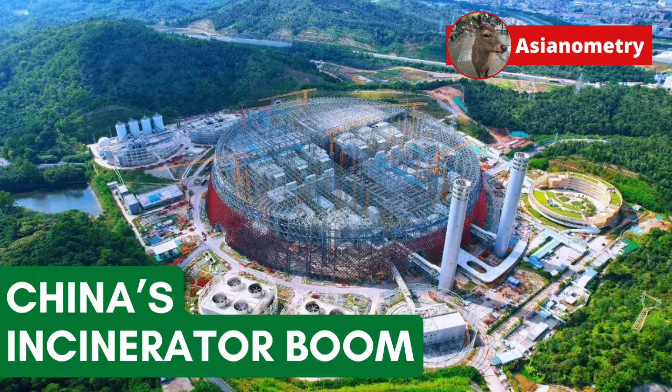How did China build 700 incinerator plants in 6 years? In today's video, a look at China's 2020s incinerator boom.

We burn our municipal solid waste for several reasons. A major one is that we want to reduce the volume of the waste. Incineration leaves behind a pile of ashes that is about 25 to 30% of its former size, saving a significant bit of landfill space. For Asia's megacities, which have limited space, this is huge.

A perfect example is what's happening in Seoul. At the start of 2026, local governments were banned from putting solid waste directly into landfills without incineration, because of dwindling space in landfills. Burning the waste also helps keep the landfill stable and somewhat clean.

It removes smells that can make landfills unpleasant places to be around, and it burns down organic trash that can lead to potentially explosive waste gas or shifting land, causing disasters. The most infamous being the December 2015 incident in Shenzhen, when landfilled construction waste slid down as an avalanche, killing at least 73 people.

One can argue certain environmental benefits. Landfills generate amounts of methane and carbon dioxide as things decay. So while burning the trash does contribute some amount of greenhouse gases, it can prevent some too. And finally, we can use this waste as a renewable energy source: waste to energy.

Waste to energy systems work like any other thermal power station. It burns waste to make steam that turns a turbine. There are several categories, the most common being the moving grate. Here, the waste fuel is put onto a downward sloping moving grate, kind of like an escalator, that slowly transports and mixes the material as it passes through the processing and incineration steps.

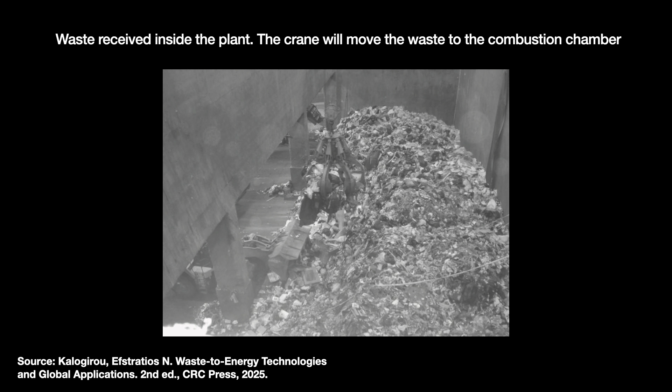First, there is a drying step. The waste material is dried with hot air passing above and fire coming up from below through the grate. We want to remove water content, as that can dampen heating. There may or may not be a shredding step. One of the strengths of the moving grate is that it doesn't necessarily need pre-shredding.

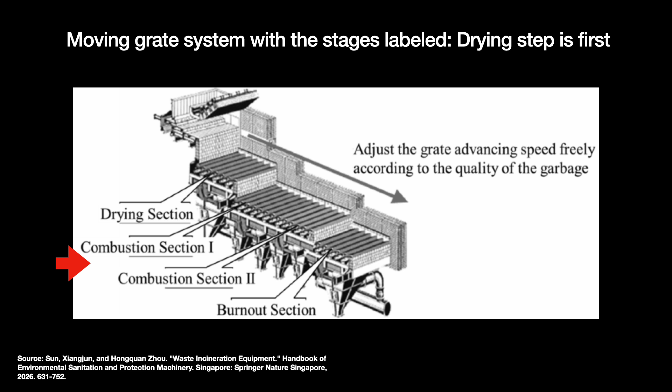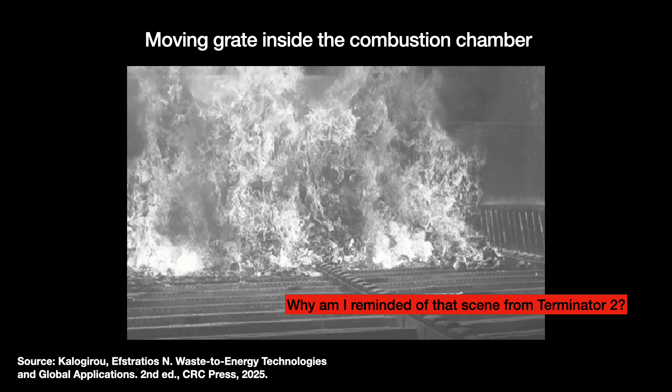Then the waste hits the combustion chamber, where it sits for at least 2 seconds at temperatures of 850 to 1100 degrees Celsius. If the items are potentially hazardous, like plastics that contain chlorine, then we opt for the higher temperatures. The remaining ash drops down through a chute at the end.

Energy leaves the furnace as flue gas and boils water inside a boiler. Steam then goes to a turbine before returning to liquid form. The flue gas goes on for post-processing.

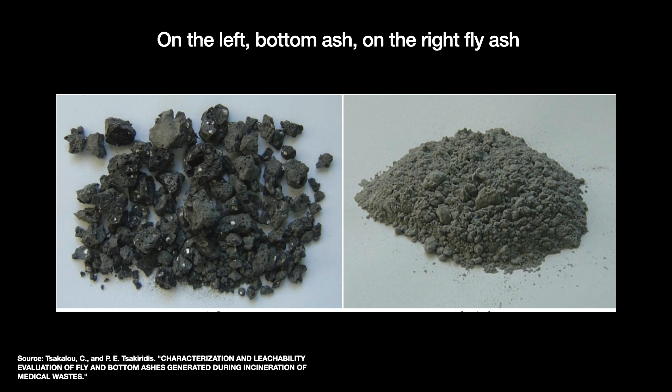I, for some reason, was reminded of the Toy Story 3 incinerator, so I went and checked. But unfortunately, that one seems to be a simple open pit, apparently for story reasons. A real moving grate, I suppose, would not have been as dramatic, but now I am concerned for Andy's neighborhood. This plant is probably very heavily polluting.

The moving grate is the most common waste-to-energy plant, but there are others. The circulating fluidized bed is an alternative that feeds waste into a chamber of hot fluidized sand. It tends to be more efficient.

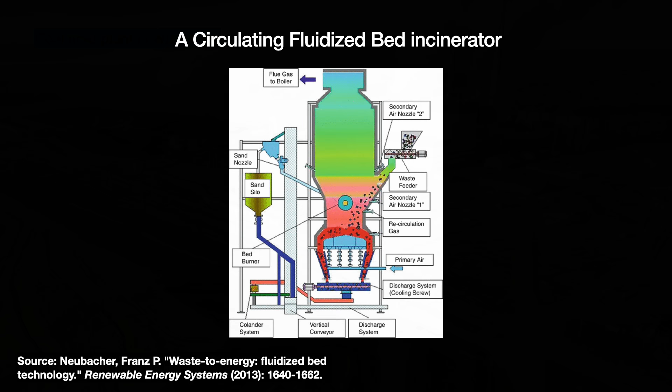Speaking of, waste-to-energy plants are generally less efficient than today's advanced fossil fuel-fired thermal plants, about 30% or lower compared to 40-ish percent. This is because the steam does not get as hot, about 400 degrees compared to 600 degrees Celsius, and that is because waste-derived flue gases are quite corrosive due to the presence of chlorine in plastics.

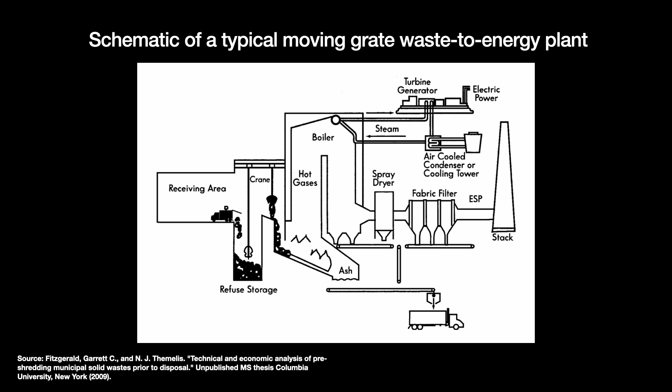The Chinese government turned to incineration and waste-to-energy not to make more power, but for a practical reason. During the economic boom days, the country was generating more trash than it could bury into its landfills.

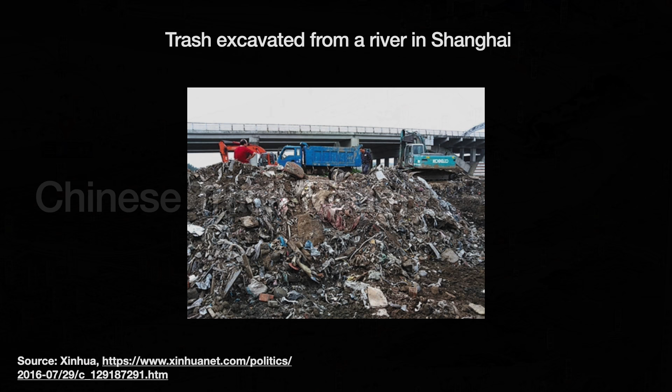In 1981, China collected about 26 million tons of municipal solid waste. To put that into context, the United States that year generated 6 times as much municipal solid waste, despite at that time having only a quarter as many people. Those two numbers are not exactly one-to-one, collected is not the same as generated, but you get the point.

Before the opening up, people didn't make that much waste. They were poor, and the solid waste they produced was mostly organic, kitchen food waste, whatnot. This is characteristic of developing countries and non-urban populations. But China's rapid development and urbanization changed both the amount of waste and its composition.

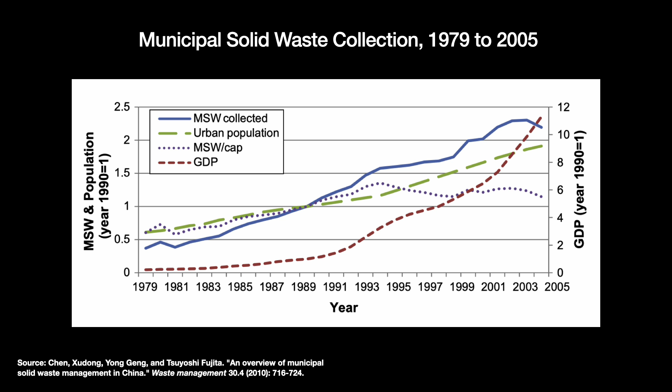The amount grew at 8 to 10% annually. No country has ever experienced such rapid waste growth. In 2004, mainland China surpassed the United States as the world's largest generator of municipal solid waste. By 2014, the amount of solid waste reached 178 million tons, nearly 7 times higher than in 1981. The waste composition also changed.

There's still a lot of organic material, but also more plastic, paper, and metal - containers, bottles, whatever. Some recycling is done by informal workers, but low material prices make that relatively unprofitable. Projections made by the World Bank in 2018 predicted that by 2030, China will be generating twice as much trash as the United States. Where are they going to put all that?

Traditionally, the dumping ground for all this trash has been the landfill. Early ones used cement liners, but trash stored there tended to leak toxic chemicals into the groundwater. More modern landfills, equipped with high-density polyethylene liners, did not emerge until the 1990s. The city government struggled to bring enough official landfills online.

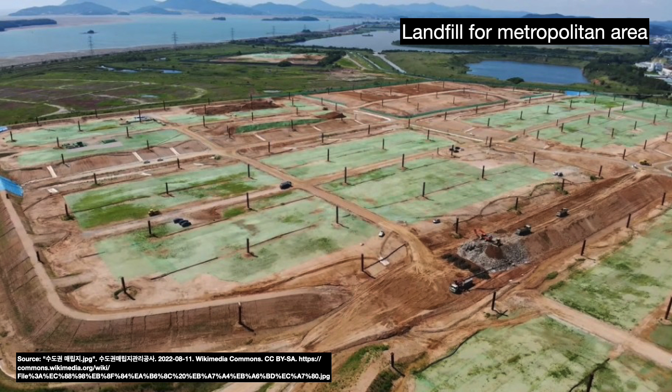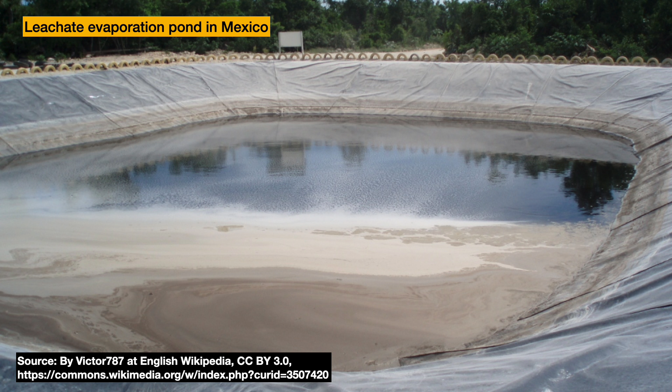You don't just cordon off an area and start dumping trash. Done right, a landfill is a multi-year project. You must survey environmental and groundwater risks, then build access roads and install liners to prevent leachate flow, waste gas amelioration infrastructure, and monitoring equipment.

Since the official landfills can't keep up, people and companies made illegal landfills and open-air dumps. Before you know it, 200 Chinese cities are surrounded by garbage, causing safety hazards to residents. This is a situation other major land-scarce countries have faced before. Megacities like Tokyo, Seoul, and Singapore have turned to incinerators as a technological solution.

So did China. Mainland China's first modern incinerator was built in Shenzhen in 1985. This incinerator had capacity of about 500 tons per day and was provided by the Japanese company Mitsubishi Heavy Industries. Mitsubishi Heavy, in turn, licensed their technology from the German company Martin in around the 1970s when Japan adopted incinerators. The two companies often worked together, combining Japanese manufacturing with German engineering.

But in the 2000s, incineration and waste-to-energy plants were not widely adopted in China. In 2002, just 3.7% of China's collected waste was incinerated. 7% was composted, leaving all the rest, well over 85%, to be landfilled.

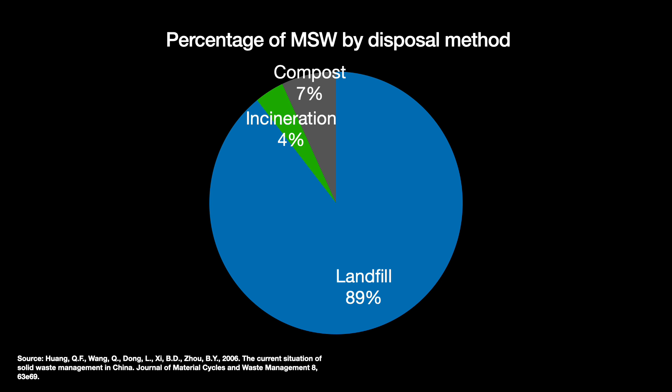There were attenuating factors, too. Chinese urban households generate a fair amount of organic trash, as I mentioned. Organics are 60 to 80% water, which causes problems for incineration, as water absorbs thermal energy, dampening its heating value.

There were also economic issues. A waste-to-energy plant has far higher capital costs, at about $66,000 to $120,000 per ton of daily capacity, with some going as high as $365,000, though that high number is more of a developed country estimate. These figures come out of the World Bank's Decision Makers Guides for Solid Waste Management Technologies 2018.

A landfill, by comparison, costs about $5,000 to $20,000 per daily ton of capacity over its lifetime. So all in all, it's about 5 to 10 times cheaper to make a landfill - even less if that landfill is an illegal one.

A fierce debate raged early on, with many saying that not addressing the core issue of waste generation is only treating the symptoms. Without proper recycling, collection, or fees to incentivize reduction, incineration just transfers the trash to the air. There are also health issues, which I will discuss later. But the need to just be rid of the waste got too real.

Famously, there was an independent 2011 documentary called Beijing Besieged by Waste, made by director Wang Jiuliang. Wang got on a motorbike and traveled around Beijing, mapping over 450 illegal landfills and dumps on Google Maps. It also called out the difficult lives of trash pickers sifting through toxic trash looking for stuff to sell, and showed terrifying footage of animals and livestock eating plastic bags. It was pretty horrid.

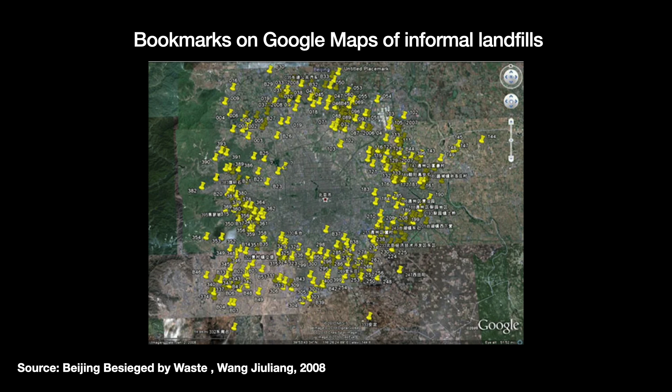The hard data and undeniable footage sparked a groundswell of public sentiment to which the mainland Chinese authorities had to respond. The 12th five-year plan, which covers the years between 2011 and 2015, noted that the country had urbanized very quickly, but its waste processing capacity could not keep up.

Thus, in April 2012, a new tariff policy went into effect that made waste-to-energy plants something that people wanted to invest in. The policy deemed every ton of solid waste to provide about 280 kilowatt-hours of power. The Chinese government pledged to pay waste-to-energy plants about 0.65 RMB for each of those 280 kilowatt-hours.

This subsidy is funded by the local grid company, with partial support from a national power surcharge. Modern plants can generate more, but everything above that 280 kilowatt hours per ton number is paid at the local coal-fired benchmark rate, which depending on the locale is far lower, at about 0.25 to 0.45 RMB per kilowatt hour.

So a plant owner-operator stands to earn about 182 RMB per ton just in subsidies, a number locked in by policy. More if they generate extra electricity, but that's basically negligible. Now they can augment that power generation money with additional revenue sources.

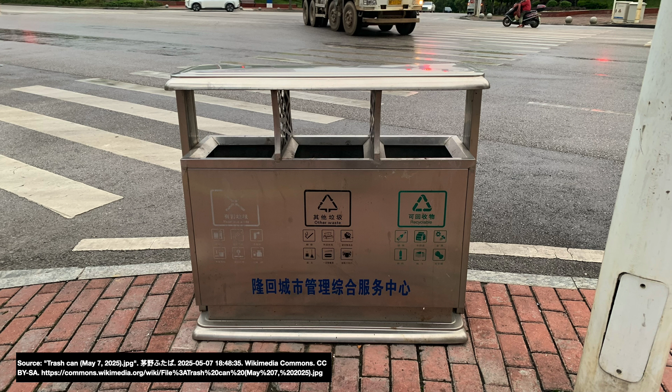The second biggest revenue source is the waste disposal service fee paid by the city. That is generally like 60 to 160 RMB per ton, but it gets put to bid, so it can be lower. Beyond that, the plant can earn money from selling heat to heat homes, disposing of industrial sludge and waste, selling power direct to AI data centers, or selling leftover metal slag. Not a lot, but it's honest work.

Companies also have a VAT refund they can get for a few years. That is a below-the-line benefit that helps raise after-tax cash flow.

Plants are largely made via the build, operate, transfer model. The company signs a long-term concession with the local government for a waste-to-energy plant. The company then raises the money, usually by selling bonds, and builds the plant. Once done, the owner runs the plant throughout the concession period, hopefully earning a healthy profit back on their capital. After the concession ends, usually about 20 to 30 years, the company transfers the asset to the government.

At about 182 RMB out of 250 to 350 total, the government subsidy provides over half of total revenue. Without it, the business is not attractive, nigh unsustainable considering how much operating leverage is involved. But with the subsidies, we have a profitable industry, and companies emerge to build and run incinerators via the BOT model, the largest being China Everbright, Chongqing Sanfeng, Shanghai Environment Protection Group, and Zhejiang Jinjiang Environment. There are over 20 publicly listed companies in this space.

Particle counts, though, can be reduced. Many years ago, incinerator facilities added afterburner zones to achieve the most complete possible combustion. They have also implemented filters to capture particles above a certain size. Even so, concerns remain about the impact of these nanoparticles that remain in the air. Such particles can easily slip past the upper airways of the nose and throat to directly enter the lungs.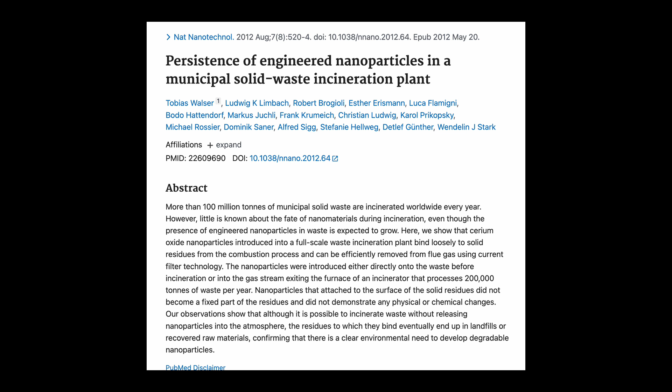But do they actually cause health problems? This, again, we're not sure.

Another issue of concern is the flue gas. It depends on the waste composition, but flue gas can contain hydrochloric acid, sulfur dioxide, sulfur trioxide, and nitric oxide. There are also heavy metals like copper and the like.

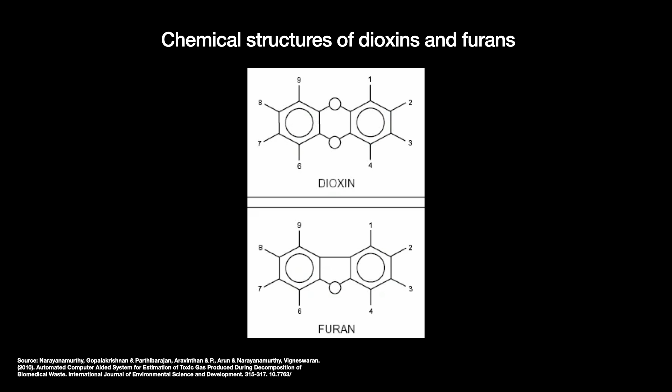But what incinerators are most infamous for are these supertoxins, dioxins and furans. This is a family of chlorinated hydrocarbons produced when we burn items with chlorine, like plastics. We know of about 75 dioxins and 135 furans. They are resistant to light and environmental breakdown, so they accumulate in livestock and foods, causing in people reproductive problems, weak immune systems, and potentially cancers.

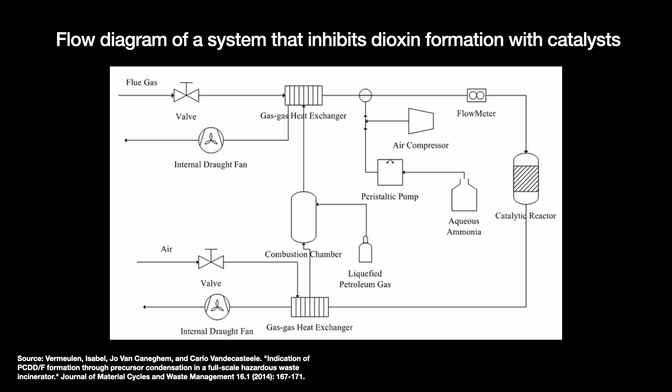The only method to remove the dioxins and furans completely is to not burn any chlorinated plastics, which isn't practical. The modern philosophy is to use multiple approaches, including high heat, which is why modern incinerators require that the waste spends at least 2 seconds in temperatures of over 1000 degrees Celsius, plus catalysts and filters to reduce the dioxin level beyond a legislated amount.

Is this okay? The evidence is controversial, with claims of fraud. Monitoring equipment is said to be unreliable. The fly ash is still full of dioxins. Moreover, there are still the other byproducts to consider like mercury, sulfur dioxide, and hydrochloric acid. There are people who take the position that an incinerator cannot be redeemed in any circumstance. Period.

One of the major issues of building these plants has been local sentiment, something we might call NIMBYism. I mentioned earlier how Seoul banned directly depositing waste into landfills, particularly in the Gyeonggi and Incheon regions outside Seoul proper. The curious thing about this ban is that Seoul is short on incinerator capacity because nobody wants them nearby.

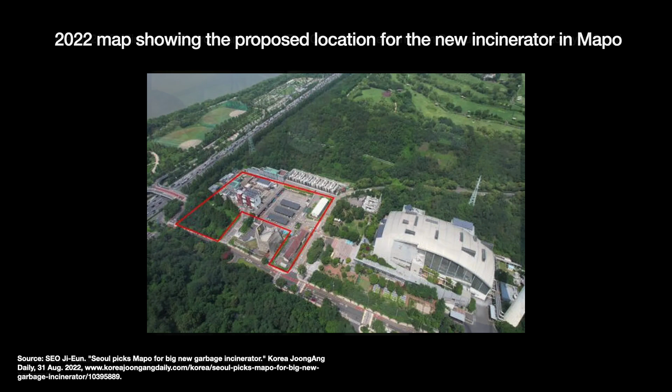A 2022 plan to add a new incinerator in the area of Mapo got tied up in court. In March 2026, Seoul declined to appeal to the Supreme Court and formally canceled the project, losing 1,000 tons per day of capacity. Another proposed project in Gangnam, where an incinerator already exists, is called a quote-unquote modernization, but Gangnam residents say it is a shadow expansion. Right now, this one is at an impasse.

These social concerns have many reasons. There are the health and environmental risks that we discussed earlier, but people also feel concerned about operational risks and the potentially massive damage that accidents can cause.

Such accident risk is not theoretical. In December 2013, there was an explosion at the Shanghai Jiangqiao Municipal Solid Waste Incineration Plant, one of China's largest at the time, caused by methane buildup inside the plant. 3 were reported to have died.

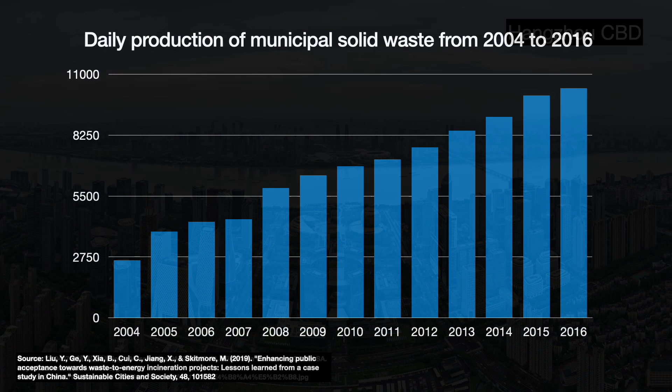The most notable NIMBY incident occurred in the city of Hangzhou, in the Zhejiang province, the Hangzhou Jiufeng plant. At the end of 2014, Hangzhou had a population of 8.9 million people and a 75% urbanization rate. Throughout 2014, those people each day produced about 9,055 tons of municipal solid waste, growing at a rate of 10% a year. To handle all that, Hangzhou had 4 existing waste-to-energy plants capable of handling about 4,600 tons per day, and 1 landfill designed for 1,920 to 4,000 tons per day.

Unfortunately, one of the waste-to-energy plants had an aging design, was too small with capacity of just 400 tons per day, and faced substantial local opposition, and the landfill was scheduled to fill up in the next 5 years. So, in April 2014, the local Hangzhou government announced a new, larger plant in the Yuhang district with capacity of 3,000 tons per day, over a third of the city's trash production. It was, if I may say, a dumpster fire.

Hangzhou is a beautiful city with a long history. The e-commerce giant Alibaba Group is headquartered there, along with DeepSeek and Unitree. Local residents also grow Longjing tea in this area, making the environmental impact doubly important. This is their livelihood. My main point is that this is a rich population that cares about where they live, and a waste-to-energy plant some 20 miles southwest of the core downtown area, even if it is somewhat tucked away in a valley, makes people nervous.

20,000 residents signed a petition to protest the plant. The local government held a brief media session promising to work with the people, but when some geological equipment was delivered to the site for a survey, social media rumors exploded and daily protests started.

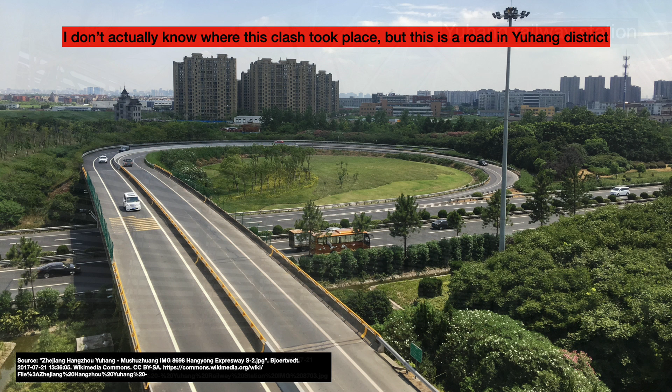It came to a head in May 2014, when tens of thousands of people clashed with police, causing extensive property damage. Protesters blocked a major highway in Yuhang and engaged in hand-to-hand combat with police. State media reported that 39 people were hurt and no deaths, which does not seem very believable to me.

When things calmed down, the local Hangzhou government pledged that the plant be suspended and go through a legal decision-making process. What went wrong here?

A small group inside the local government sited the plant. They chose it on sensible technocratic grounds, tucked inside a former stone quarry and accessible without going on residential roads, but it was done without transparency. Then they announced it and tried to rush it through without proper public involvement. Since the public wasn't consulted, they got angry and lashed out, forcing the government to rally resources to defend its choice. This tragedy in 3 acts is called by academics decide, announce, defend.

It is also sometimes jokingly called decide, announce, defend, abandon, for obvious reasons. It is not possible to eliminate NIMBY feelings, even for the Communist Party. But what you can do is channel those feelings earlier into the design and planning process, where they are less likely to interfere at a late stage, and you can educate and engage with the public to gain general acceptance.

After the 2014 mass incident in Hangzhou, the local government did not abandon the plant. They concluded that the lack of transparency in decision-making and the government's inconsistent statements diminished the public trust, so they rebooted it. The old operator was a state-owned startup firm, and their lack of experience was a core source of distrust. They were replaced with Everbright, a larger, more experienced company.

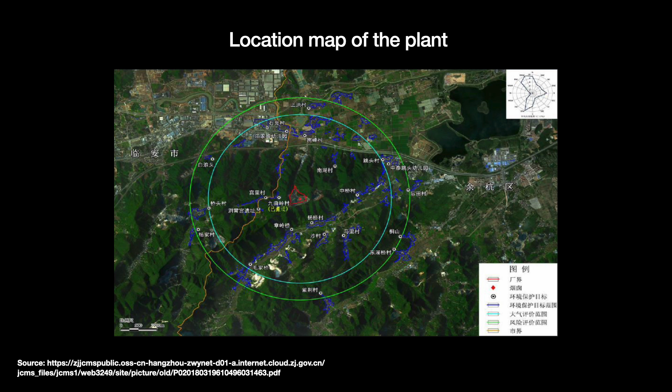Documents in the process were made available online, and local residents were brought into the process. Government staff was mobilized to visit and interview over 25,000 people, collecting 500 suggestions and concerns. A special disposal fee was attached to fund these environmental initiatives, and local residents were hired as supervisors.

The Yuhang district also promised $360 million of financial support for tourism and infrastructure. Whether this was ever delivered, I'm not too sure. The government and company also arranged local hearings where Everbright experts answered questions. In the second half of 2014, 5,000 local residents were bused to other Everbright facilities and shown how it worked, including the presence of automatic monitoring equipment.

A year later, in April 2015, construction restarted. The plant entered operations in late November 2017. This success largely created the playbook for handling NIMBY sentiments: a clear focus on community engagement, careful site selection, automatic monitoring, long standard EIA procedures, and more. It doesn't remove all the sentiments. Blockades and NIMBY feelings continue to exist, particularly in areas that already have a few incinerators, but construction can move on.

So the 2012 tariff created an attractive business model. The government learned important lessons on community engagement after 2014. Next comes the boom. The Chinese central government had set a goal of about 591,000 daily tons of capacity by 2020 and worked backwards from there.

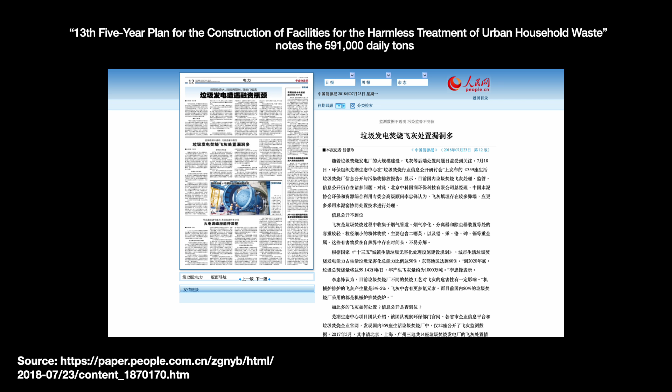In December 2017, the government ordered its provincial governments to finish preparing their site selections by 2018. Since a plant takes about 15 to 24 months to build, a 2018 site selection deadline gives enough time to finish their plants by 2020. This created a concrete pipeline that you can rush to hit the deadline.

Between 2013 to 2017, China added just 41 new waste-to-energy plants each year. End of 2017, there was a total of 360 across the nation. But in mid-2019, state media reported that there were at least 400 projects then in progress across the nation. The boom was already underway. By 2020, China had 462 operational waste-to-energy plants. National incineration capacity reached 580,000 tons per day, essentially hitting the target.

But looking by region, progress was uneven. East China hit their marks, while West and Central China did not. So the central government raised the target to 800,000 tons per day, with a focus on rural areas. They also changed the subsidy structure. Any plant started after January 2021 will no longer get the 0.65 RMB per kilowatt-hour subsidy. Moreover, the subsidy will sunset after 82,500 hours for all plants.

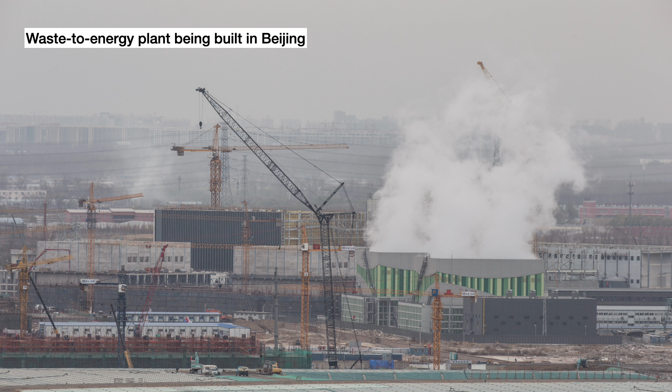The VAT refund was also partially lowered. The intention was to force the waste-to-energy plants not to rely on power generation revenue, which is not economical compared to solar and wind, and turn to generating secondary revenues like city waste disposal fees. It also tried to make them more efficient. All projects were declared to be finished by 2023.

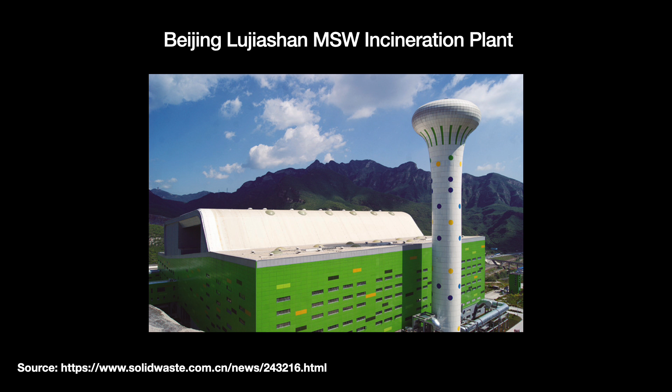Thus, by the end of 2024, we have a total of 1,137 waste-to-energy plants across the nation, and what has been commonly discussed in media as a quote-unquote regional imbalance. There is a lot of imbalance. 60% of total incineration capacity is in 5 provinces: Zhejiang, Jiangsu, Guangdong, Shandong, and Fujian.

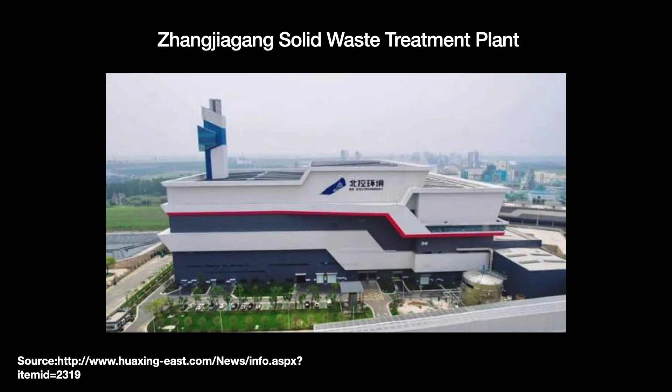Between 2023 and 2025, the E20 Research Institute reported that the average capacity utilization rate of domestic waste-to-energy incineration projects was about 60%. Some plants have utilization rates of 80+%, others as low as 24%. About 16% of projects have a capacity utilization rate below 50%. And it is rough for them because fixed costs are very high. If these are not being used, they are losing money. A lot of money. That's why they're going back and digging up older landfills.

Growth will be slower post-2022. These businesses must find new lines to replace their subsidy revenue. In addition to just charging the cities more, meaning citizens pay more expensive trash collection fees, there's also expanding into rural areas, building plants abroad in places like Indonesia, and developing new business lines like smelting.

As I said earlier, there are plenty of voices that see this as an absolute win. In an FT article covering this, a representative said at the end, quote, 'Having less waste is actually a good thing. It means the environment is improving,' end quote. I do not know what to make of that. It's nice to not have trash lying around for sure, but sending it all into the air doesn't sound very sustainable either.

But there is one thing to consider: how the Chinese government managed to expertly spur private industrial development and build these extremely unpopular items in a genuinely short time that is legitimately impressive. There is something to be learned from it.